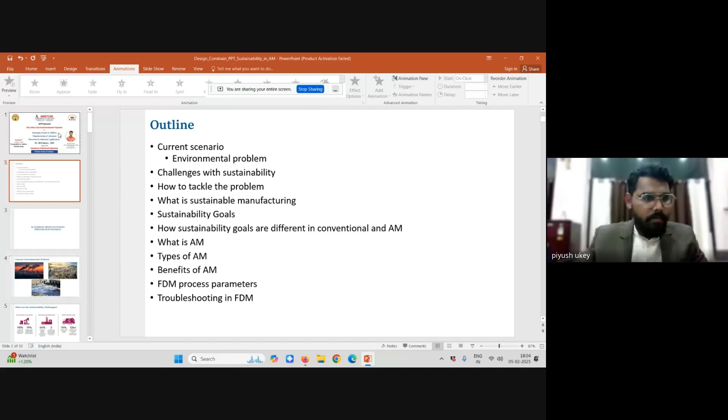First of all, I'll share the screen. Over to you, sir? Hello. Yes, sir. Thank you, sir. Can you see the slides, sir? Yes, sir. Thank you so much, sir. So let's begin with today's session.

So I'll begin with the question. So what do you think? Is the current manufacturing process sustainable? You can write in the chat box if you want.

So obviously, the current manufacturing process is not sustainable. If we talk about the current environmental problems, carbon emission is one of the major problems with the conventional process. Even the plastic waste, or the waste collected after the manufacturing process, is one of the major challenges. And water pollution is also one of the major issues with industrial production, as wastewater is deposited into the river, which pollutes the water. So these are major issues because of the current conventional manufacturing processes.

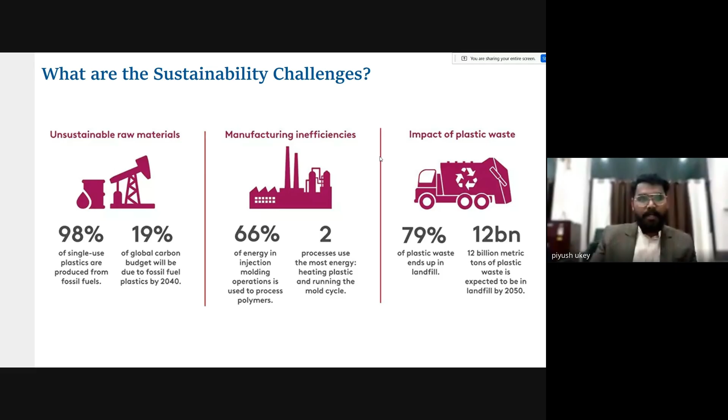So in order to make the world more and more sustainable, we need to cater to all these challenges which are there with sustainability. And how to tackle this problem? We can tackle the problem by using the resources more and more sustainably. Okay, to use the resources more sustainably, we should always follow the 5C approach, which is clean, community, culture, care, and corporate governance. So if we follow these 5Cs, we can optimize the use of the resources which are needed in the manufacturing sector, and thus make our world more and more sustainable to live in.

Because with the current setup we are living in, with more and more carbon deposits, we are polluting the world in a very big way. So the upcoming generation may not have the cleaner environment that we had. Our ancestors had one of the cleanest environments to live in, and we are living in, not the most, but at least a polluted environment where we don't have filtered or clean air to breathe. And if we continue with the same process, with the same attitude, then our future generation will live in worse condition than what we are currently living in. So in order to make things more and more sustainable, to reduce the impact on the environment, we should follow this 5C approach.

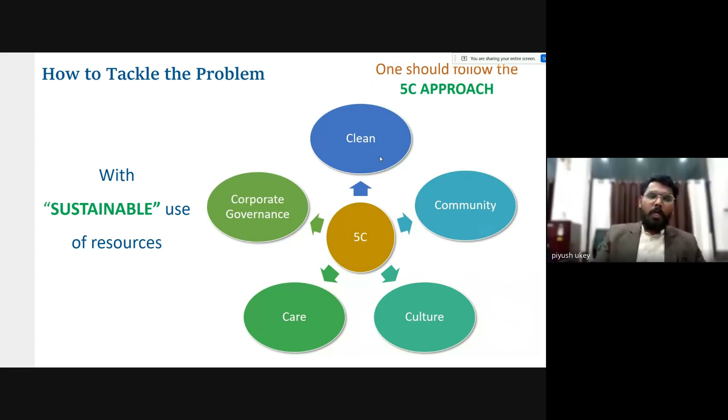Okay, so now coming to the main question, what exactly is sustainable manufacturing? So sustainable manufacturing is nothing but a process by which we can create a product by using the resources sustainably, by using optimized resources. For example, if we can make something which can reduce the carbon footprint in the environment, which can reduce the waste on the environment, if we can recycle the material and use that material, then ultimately it reduces the overall load on the environment. So that's what sustainable manufacturing is. The optimum use of resources to manufacture something is known as sustainable manufacturing.

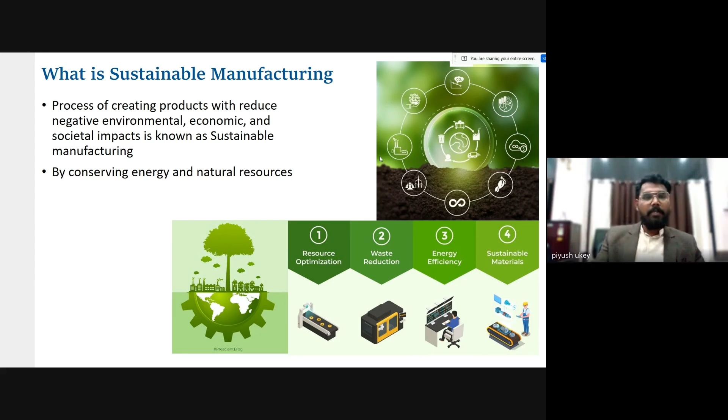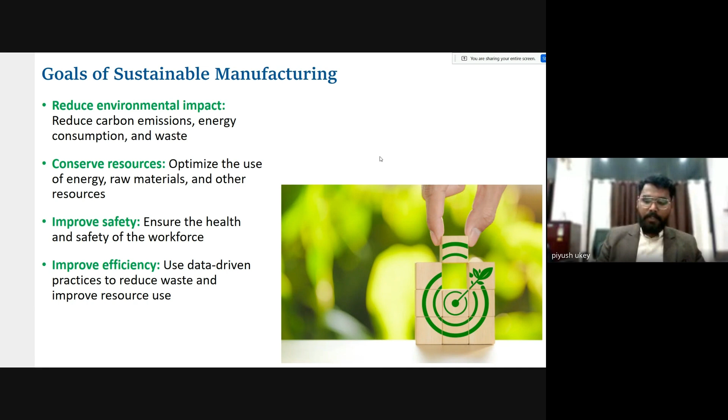Okay, so in sustainable manufacturing we can work in four areas: we can optimize the resources, we can reduce the waste, we can make the process more and more energy efficient, and we can make more and more sustainable products, like we can recycle the product. So if we talk about the goals of sustainable manufacturing, the goals are: reduce environmental impact, conserve the resources, like optimum use of energy, raw material, and other resources which are needed. We can improve safety, and we can improve the overall efficiency of the workplace as well as the product. Okay, so these should be the goals of sustainable manufacturing. So this is all about sustainable manufacturing.

Now coming to the next question, what exactly are the different manufacturing processes? So suppose this is the part which we want to make. Basically we have three manufacturing processes. The first one is the formative process, the second one is the subtractive process, and the third is the additive process. So in the formative process, we need a mold into which the molten plastic will flow, and once the plastic is solidified inside the mold, we will open the mold and remove the part. So initially only the mold is going to be there. The raw material will be in the form of a liquid, which will be poured into the mold, and finally we will receive the end part. In this process, there is minimum wastage of raw material.

Okay, but if we talk about sustainability using this process, the first thing is we need to prepare the mold. In order to make the mold, certain kinds of resources are needed. The mold will be made of metal, so a subtractive machining process will be done there, or maybe casting is going to be done to prepare the mold.

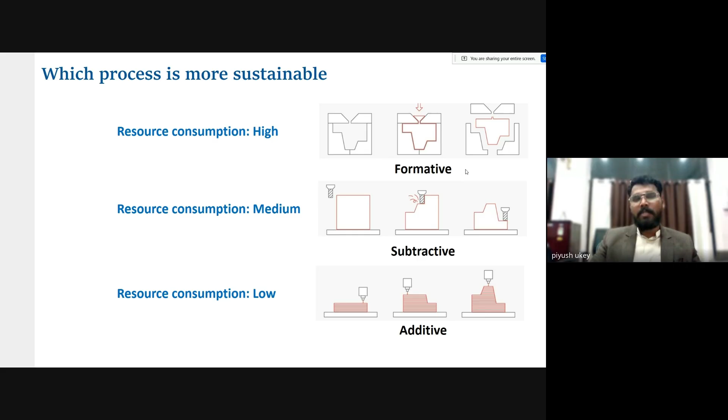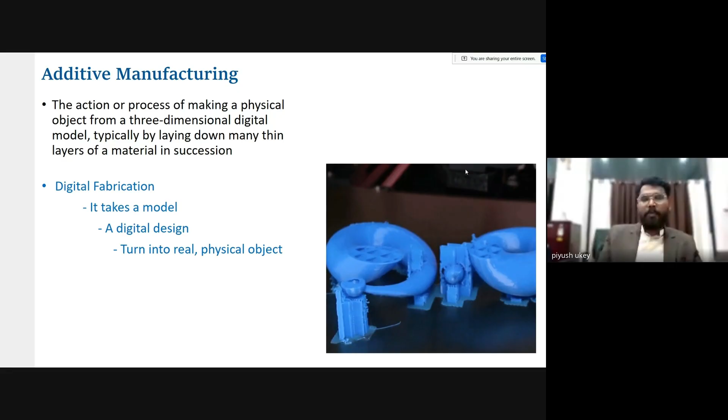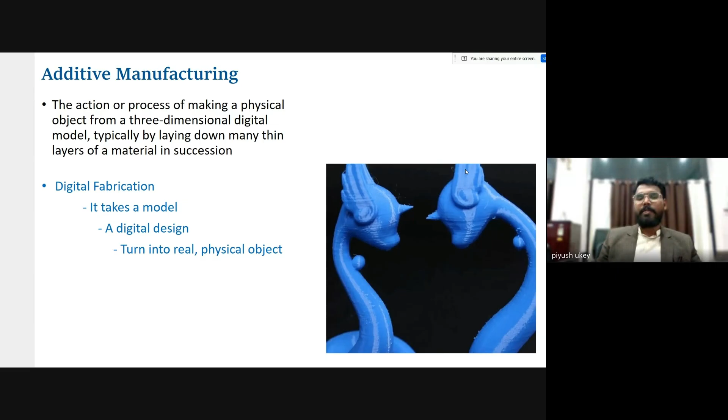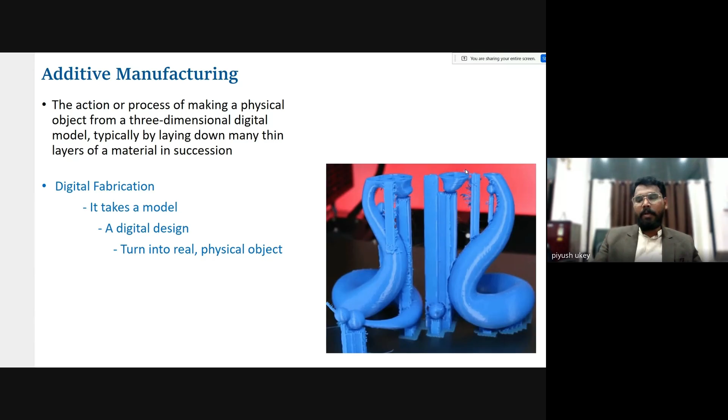So what exactly is additive manufacturing? Additive manufacturing is nothing but fabricating the part layer upon layer by stacking each layer one above the other. So additive manufacturing is a process of converting any digital design into a real physical object. Okay, as we can see in the video, the part has been fabricated layer by layer. Initially, we have nothing on the bed, but slowly, gradually, after printing each and every layer, the layers are added one above the other, and finally, we are going to get the end product. So this is additive manufacturing.

If we talk about the process chain of additive manufacturing, initially we need the CAD model. Once we have the CAD model, we are going to convert the CAD model into an STL file, which is also known as tessellation. Then slicing of the STL model is going to be done, followed by toolpath generation and support generation. Once the toolpath has been generated, we are going to transfer the toolpath or the G codes.

We will save the toolpath in terms of G code, and then this G code will be transferred to the 3D printer either by using a pen drive or a memory card, whatever the system supports. So based on the transferring medium, we just need to transfer the G code into it, and then the transferring medium can be loaded into the 3D printer, and the 3D printer will print the part accordingly.

And then once the part has been printed, we need to do the post processing. In post processing, support removal is going to be there. Even if certain kinds of surface finishing operations need to be performed, those surface finishing operations are also going to be performed in the post processing. So this is the overall process chain of additive manufacturing.

Even if we try to classify additive manufacturing into different kinds of technological classification, we have around 14 to 18 types of additive manufacturing processes. And in all additive manufacturing processes, despite the technology that has been used, this basic process chain will be followed by every technique of 3D printing. So coming,

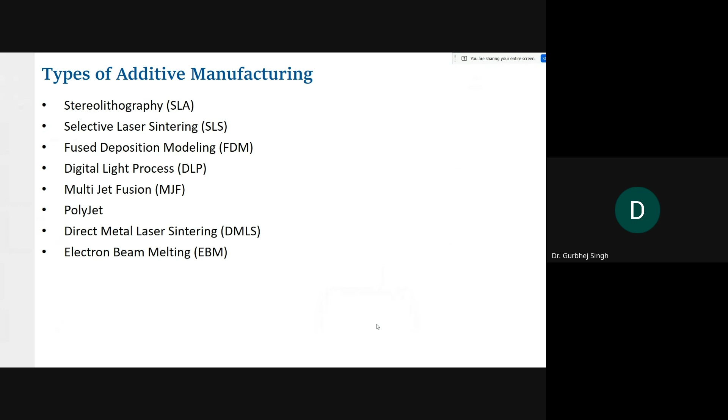So coming towards the types of additive manufacturing process, we can categorize additive manufacturing into three basic types based on the type of material used: liquid, solid, and powder. These three are the basic categories in which additive manufacturing can be classified. And among these three, we again have sub-classifications of the technique, like SLA and SLS.

If we talk about the first process, that is stereolithography, it is a liquid type 3D printing process. Then selective laser sintering is a powder based process. Then we have fused deposition modeling, which is a solid based process. Then digital light processing, DLP printing, which is again a liquid type 3D printing process. Then the multi-jet fusion technique, which comes under the powder bed technique.

Then we have the polyjet technique, which comes under liquid 3D printing. And we have direct metal laser sintering and electron beam melting. These last two are metal 3D printing processes, and all the remaining processes mentioned here are polymeric 3D printing processes.

Okay. So among all these processes, the most commonly used 3D printing processes are FDM and SLA/DLP. These two are the most commonly and most widely used in the sector. Even if you have a 3D printer at your institute or facility, it might be either FDM or SLA/DLP.

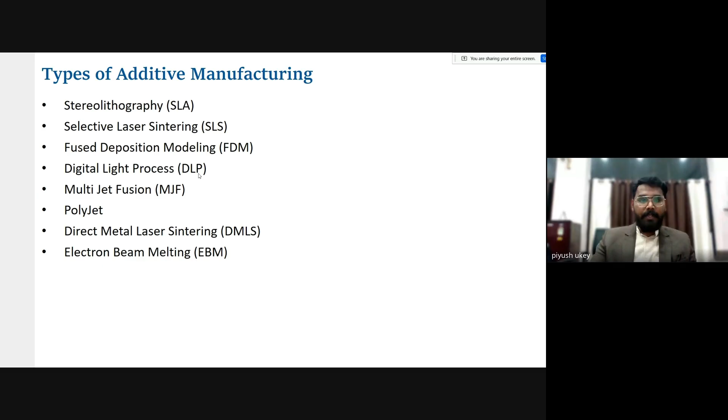After these two processes comes SLS. But very few institutes have an SLS facility, while 90 to 95% of institutes definitely have either FDM or SLA/DLP. So these techniques we are always going to find in the institutes. Okay, so I'll try to explain FDM as well as the SLA and DLP processes.

So coming towards the first process, FDM 3D printing. In the FDM 3D printing process, the material will be in the form of wire. Here we can see two wires being fed into the extruder system. The dark blue is the main material and the light material is the supporting material. We feed this material into the extruder head, where the material will be heated in the extruder nozzle assembly.

So this is number 4, the extruder nozzle assembly, where the filament is going to be heated, and finally the material will be extruded from the nozzle. The nozzle will move in the x direction, as we can see in the image. This is the nozzle tip from where the material is extruded. The nozzle is moving in the y direction. This is the bed moving in the z direction.

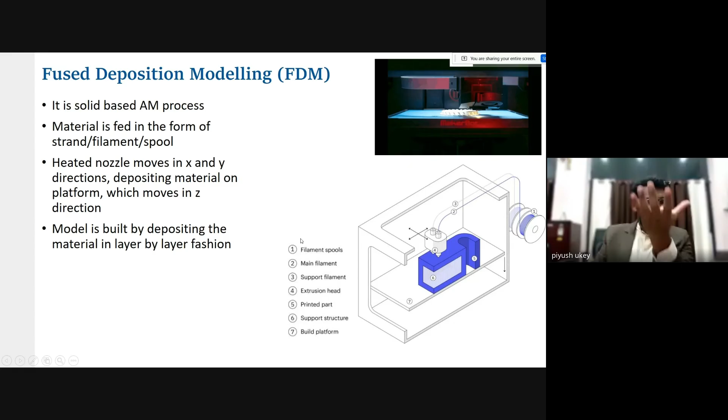Once one of the layers has been printed, the bed will move downward subsequently, and the successive layer will be printed there. So this is how the FDM 3D printing process takes place.

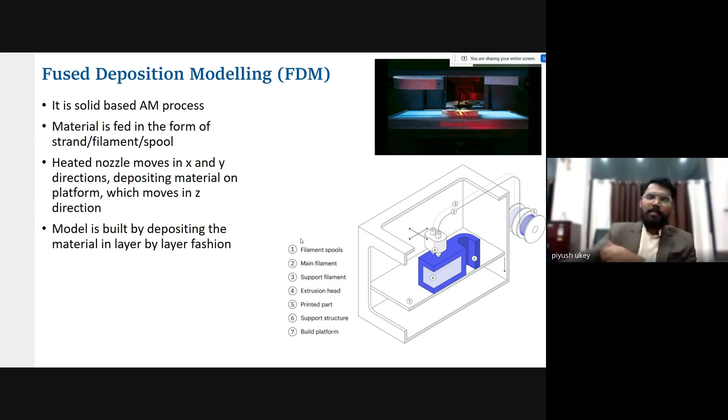Then if we talk about the SLA/DLP process, the working principle is that we use a photopolymeric resin in the form of a liquid, which will cure once it has been exposed to UV light. So here, in order to start polymerization, the material has to be exposed to the UV light.

So the process is, once this photopolymeric resin is exposed to the UV light, the laser will follow the tool path which has been generated during slicing, and according to the G-code, the laser will follow the tool path and the material will start getting cured. Whereas in DLP, the entire layer will be projected at once, and the whole layer will be converted into a solid form.

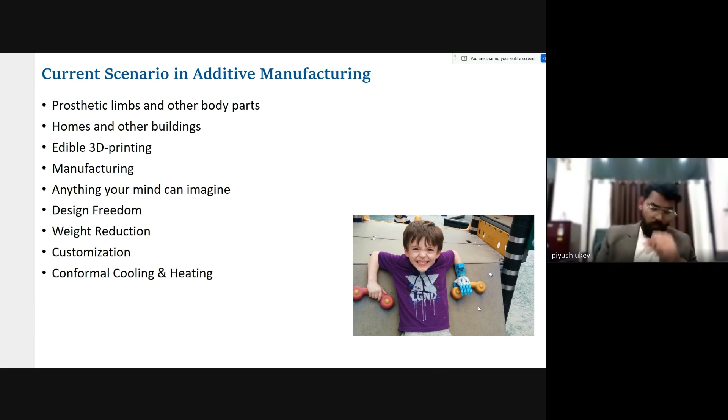And once we do this design modification and design iteration, we directly print the prosthetic and give it to the patient. So likewise, we can reduce the overall product development time with the 3D printing technique.

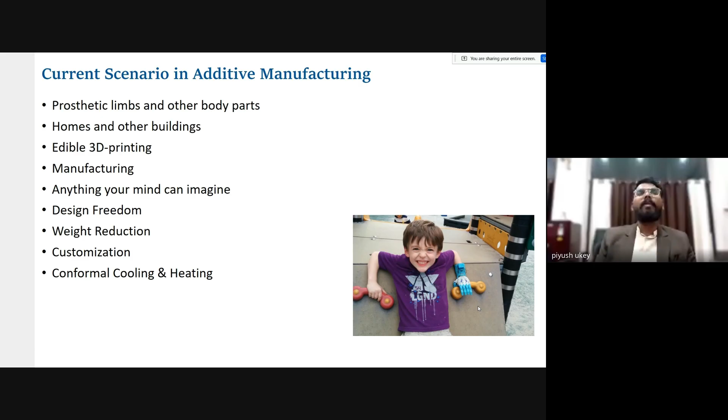Another one is home and house building, like construction. Now 3D printing is widely being used in the construction industry. In India, there are a few startups who are actually working in this sector. And L&T is also one of the first companies trying to get this commercial in the market. So this is also one area which has very good potential in the market.

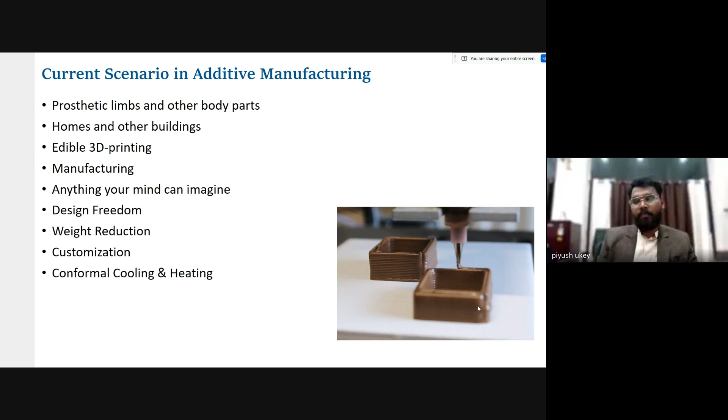Then we can use 3D printing for food printing. The food industry is also trying 3D printing a lot. They're trying to make parts with the optimum kind of material and resources needed. And with 3D printing, they can make many creative shapes in chocolate or cream toppings. So they have design freedom with 3D printing, and they can make complicated shapes.

Then we can use 3D printing in manufacturing. Now 3D printing is shifting from prototyping towards manufacturing, and many people are shifting towards manufacturing. Like the space industry is using 3D printing a lot in the manufacturing process to make their actual end components. Initially, in the 1990s or 2000s, when 3D printing was introduced into the market, 3D printing was mostly used to develop prototypes.

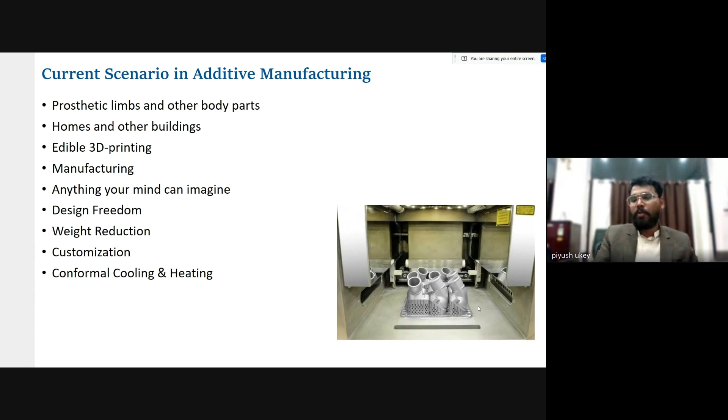But now the shift can be seen, like 3D printing is shifting from prototyping towards end-user manufacturing. Then we can make such kinds of complicated shapes. Whatever comes into the mind, we can make by using 3D printing. So this is one of the good tools for designers to make something creative out of their mind.

And such kind of complicated structure is impossible to manufacture by using a conventional process. We cannot do casting of this model, we cannot do CNC machining of the model, we cannot even do injection molding of the model. These kinds of structures are quite complicated to manufacture. So for such structures, 3D printing comes to the rescue, and 3D printing is the only option we can use to manufacture the parts.

Then we have design freedom. This is the example of a fuel injector nozzle which has been used in one of the aircraft. Initially they used to make this fuel injection nozzle in different smaller components, and later they used to assemble all the components together, and the final fuel injector assembly was used in the aircraft. And now they have reduced all the components into a single component, and they are manufacturing the entire part as a single 3D printed component.

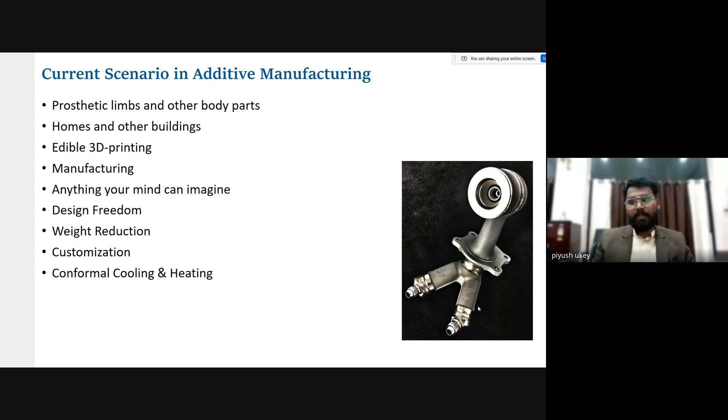So the beauty is, since we have reduced the components, we have reduced the weight, and with reduced weight, we have increased the overall efficiency of the part. Since we're talking about aircraft, if we could save 1 kg of load, we are obviously going to increase the overall efficiency of the aircraft. So with this kind of structure, they have increased the overall efficiency, the fuel economy of the aircraft.

Then we can work with weight reduction. Suppose this is the original model which needs to be manufactured. Due to shape and size constraints, we got the outward convex hull of the model. We know the maximum x, maximum y, and maximum z dimensions of the model, which we cannot change due to certain design constraints. If we manufacture it using CNC or any conventional process, this is the model which is going to be manufactured, and it is not going to be a weight-optimized model, since it's quite big, quite bulky.

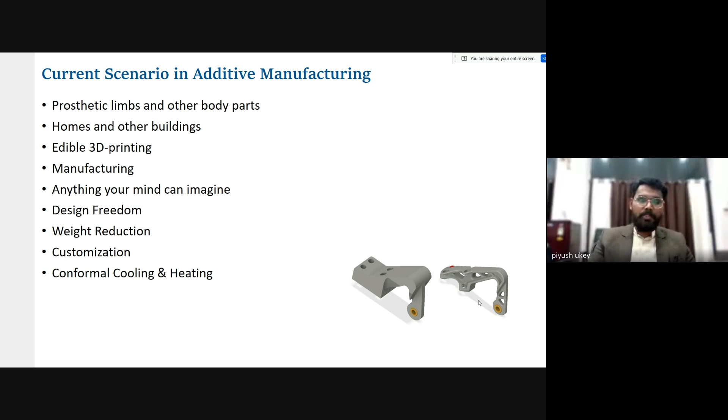But then we can do design topology optimization, and we can optimize the overall part into this kind of structure, where we can remove the material from the excessive parts, wherever we don't need much strength, and wherever strength is needed, there we can add material. So this is how we can optimize the overall topology of the design and reduce the weight.

Then we can use 3D printing for customization. Customization of the hearing aid is also possible with 3D printing. This is the example of a conventional process, where if someone wants to manufacture a hearing aid for the patient, first they'll pour silicone into the ear, and this kind of pattern will be manufactured. Then this pattern will be used to make the mold of the hearing aid, the enclosure will be produced, assembled with the electronic components, and the final hearing aid will be delivered to the patient.

But with 3D printing, instead of pouring silicone and making the pattern, we can directly 3D scan the ear of the patient, and once we have the 3D scan, we will have the 3D CAD model of the ear. Then we can directly design this kind of enclosure virtually. We can do the virtual fitment there itself. We can make the design more optimized, more economical. And once we have the optimized design, we manufacture it with the 3D printing process.

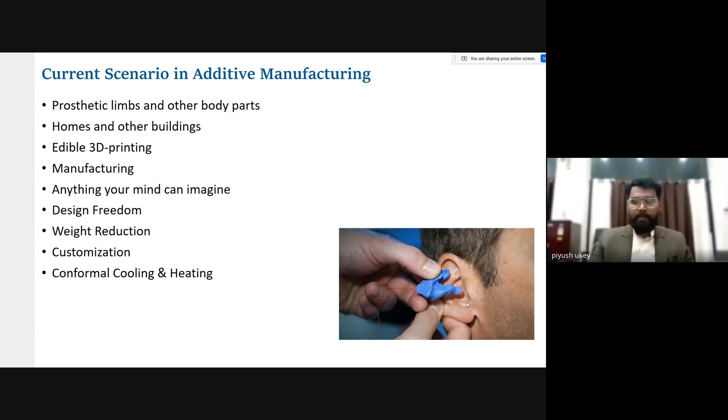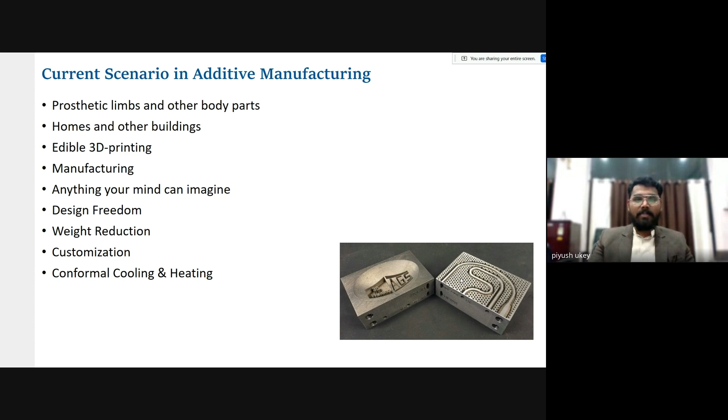And the last example is that we can use 3D printing for developing optimum heat exchangers. This is one example of a heat exchanger where we can reduce the weight of the part, and the weight reduction can be done by optimizing the overall density of the part. If we reduce the weight of the part, obviously less energy is needed to make it, and ultimately we can save a lot of energy and a lot of carbon deposition into the environment. So these are the current scenarios where additive manufacturing is mostly used.

Coming to the benefits of additive manufacturing, we can use additive manufacturing for batch production. Suppose this is a part which needs to be manufactured in a small batch; we can use 3D printing for batch production. Then we can use 3D printing to reduce the overall product development cycle time.

In the conventional process, first we ideate the design, ideate the part, then a prototype is made, followed by manufacturing, then assembly and distribution. From assembly we distribute the part, it goes to the warehouse, retail, and finally to the end user. So this is the overall product development cycle whenever we plan to develop any product, the conventional cycle mostly used to develop any part.

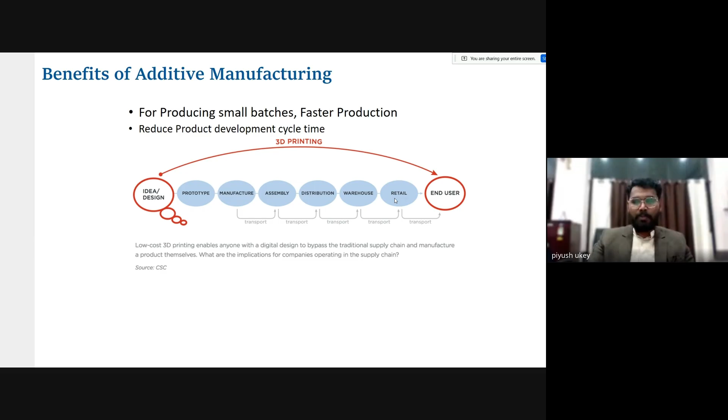But if you're using a 3D printing process, from the idea we can directly generate a virtual CAD model, and in the virtual CAD model we can do the design iterations. Whatever design iterations are needed to make the final product can be done virtually there itself. Once we have a final, ready-to-market design, we can print that design and directly give it to the end user for testing or the end purpose. Likewise we can eliminate the middle processes and save a lot of time and resources needed in product development.

Then, with 3D printing we can make complex shapes for tooling and pattern making. For casting, or for rapid tooling, if you want any patterns, we can definitely use the 3D printing technique for that.

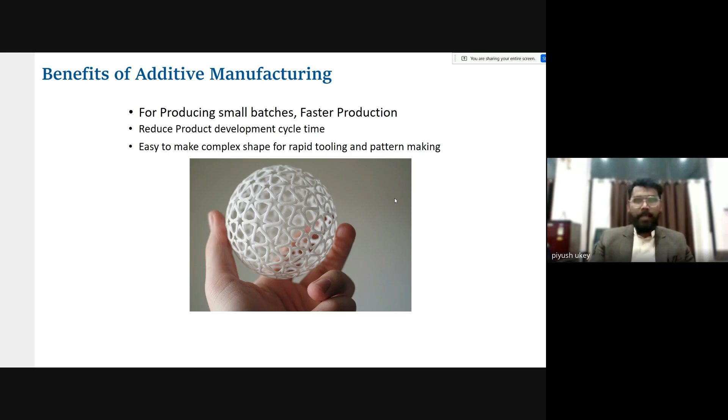Then customization: with 3D printing we can do mass customization. If I want to customize a particular product for the masses, we can do it quite easily with optimum resources using 3D printing. If I want to do the same with the conventional process, every individual product manufactured for a custom need will need a mold. If you're manufacturing with injection molding, every product will need a different mold. So n number of molds will be prepared, and with each mold different parts will be made. To cater to each one, an individual mold needs to be manufactured with a conventional process.

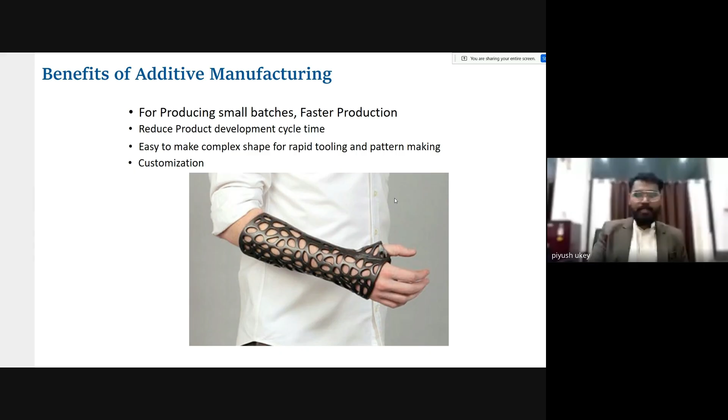But with 3D printing we can do this design customization virtually in the CAD model. Once we do the design customization in the CAD model and get the final design ready for print, we can print the part and give it to the user. That's how we can solve the customization problem. Then we can make creative, customized designs for the end user.

Again the same thing: if you want to make such complicated structures with a conventional process, first of all it is impossible with any conventional process. And second, even if we can manufacture certain designs with the conventional process, to meet the custom need we need an individual mold for each and every design we manufacture.

So with 3D printing, we can keep our canvas, or our catalog, quite big compared to the conventional one. I can keep hundreds of designs ready in my digital catalog, and the user can go through the digital catalog and select the particular design they are interested in. We can then manufacture that design using 3D printing. That's how we give the user customization freedom.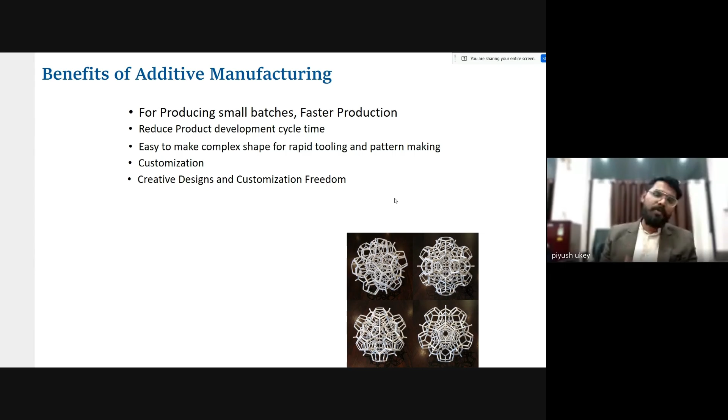So we give them a very big catalog to select the product from, which is actually quite difficult with the conventional process. Okay, so these are the benefits.

And coming towards the last one is the waste. We develop very little waste in the 3D printing process. If we talk about the subtractive process, subtractive is one of the most waste-generating manufacturing processes. And in 3D printing, since we are manufacturing the product layer by layer, initially nothing is there on the platform, and with the deposition of subsequent layers, the final part is going to be printed.

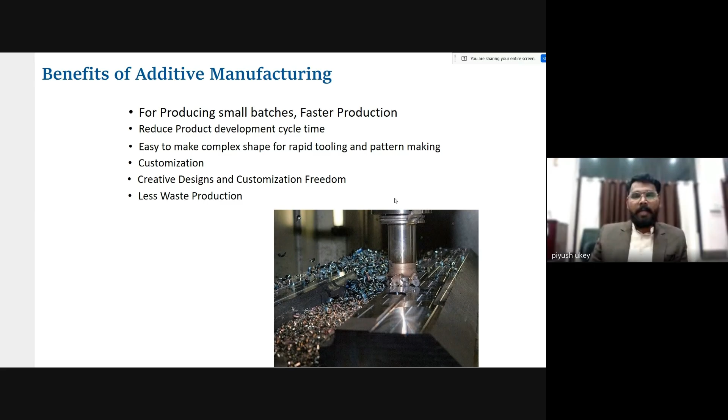So likewise, we can manufacture the part with very little waste. Okay. So these are the benefits of additive manufacturing. So coming towards the sustainable goals of additive manufacturing. In order to reduce the overall environmental impact, we need to reduce the use of raw material. So how can we reduce the use of raw material?

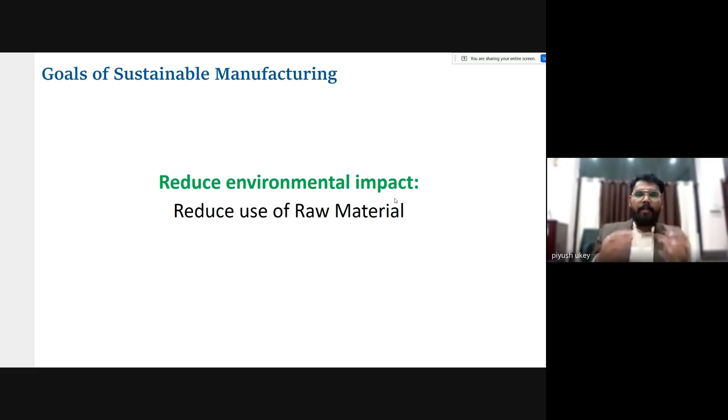If we talk about the raw material used in the FDM technique, the basic plastics being used are mostly ABS, then nylon, PC, and PETG. So these are the plastics which are being used. These plastics come from fossil fuel.

From the fossil fuel we manufacture the pellet, then this pellet will be converted into a filament form of material, which we consume to make the end product. Once the life of the end product is completed, that end product will either end up in the open landfill as waste, or we can recycle the material and bring it back to manufacturing, where the pellets are manufactured. From the pellets, the filament will again be made.

So this is how we can recycle and reuse the material again and again. So this is what we talked about for fossil fuel material. We can also use eco-friendly material like PLA, which originates from plants. That PLA plastic will be converted into the pellet, which will again be converted into the filament. From the filament, we make the end part, use it, recycle it, and again manufacture the pellet and the filament. So this is the circular economy.

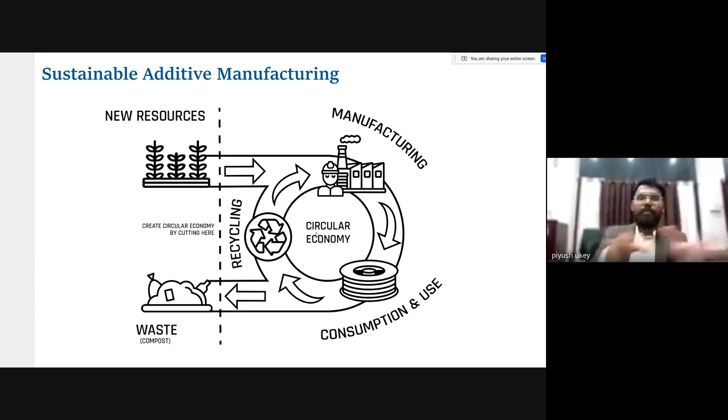And obviously, we cannot recycle the plastic again and again. We need to mix it with a certain amount of fresh plastic to ensure the strength of the plastic, because every time we recycle the material, certain properties are degraded. So likewise, we can reuse the material and make things more and more sustainable.

Okay. So another environmental impact is reduced waste. Whatever waste we're talking about, this is one part where the raw material is reused again and again. And second, if you're not interested in reusing the raw materials, then that part will end up as waste in the environment. So another challenge here is the reduction of waste. If we want to make the overall 3D printing process more sustainable, we should focus on two things: first, recycling of the raw material, and second, reducing waste material.

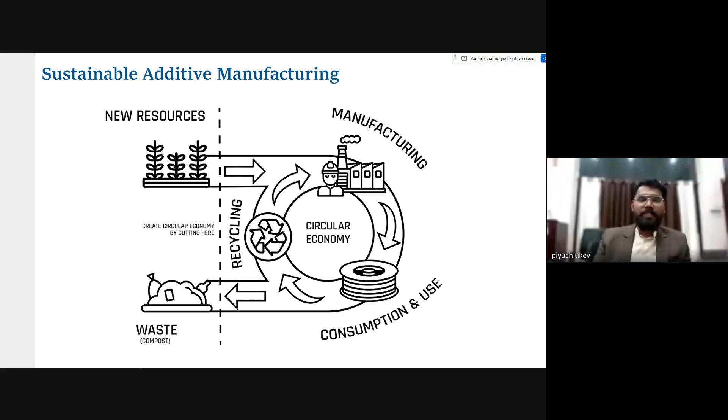So how can we reduce the chances of print failure? Again, that is one of the most challenging tasks, to reduce print failure. So if we talk about print failure, first of all we should know why print failure is occurring. Is it because the printer is not working properly, or the printer has not been calibrated properly, or is it the parameters, the G-code we have generated? Is it that we have not generated the optimum G-code for the 3D printer to manufacture the part?

So we need to find out these two ways. To reduce print failure, we should always focus on two things. The first one is the 3D printer calibration, and the second one is the process parameters being used to generate the G-code. Okay. So if my printer is calibrated properly, then the second thing is we should always focus on the parameters used while developing the G-code. We should use optimum values for the process parameters while generating the G-code. If we do, the chances of failure are going to be very less.

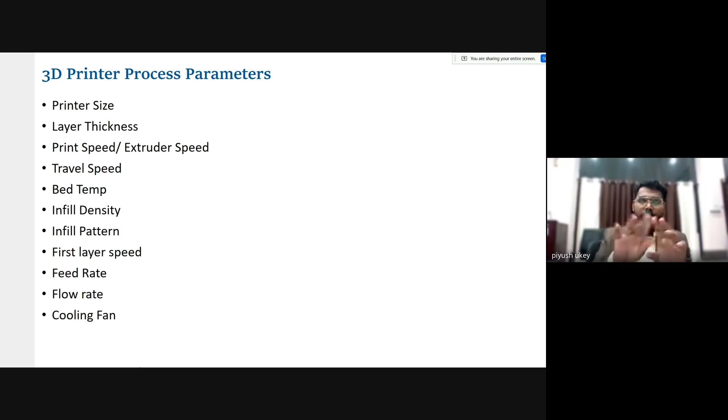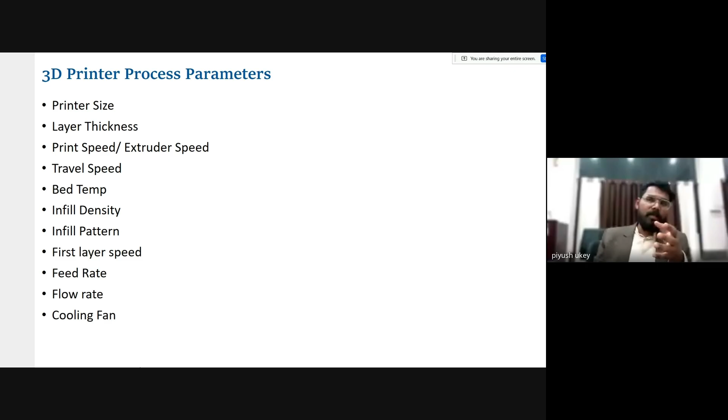For example, suppose I'm using a Creality Ender 3 3D printer, and in the machine printer size setting I have selected something else, let's say the Creality Sermoon 3D printer. Both 3D printers have a different build volume. If the build volume is different, obviously the basic settings will be different. So if I generate a G-code for the Sermoon and use it to print on the Creality Ender 3, obviously the part is going to fail. So the first thing is we should always choose the proper size and type of the 3D printer being used.

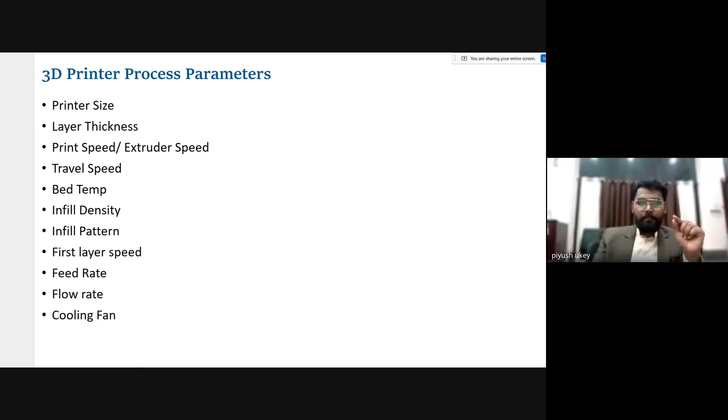Okay. The second parameter is the layer thickness. Again, layer thickness has a very crucial impact on 3D printing. This is the rabbit, the bunny, which we need to print. If I print it with a thick layer, the part is manufactured with a very rough surface finish, as we can see on the face. But a thick layer has a beauty: very little print time is needed to make the part.

But if you print it with a thin layer, here we can see the surface finish is going to be improved a lot. We won't get the exact surface finish of the CAD model, but the stair-stepping effect is reduced a lot. So the surface finish is quite smooth compared to the thick layer, and this is high-resolution printing. But obviously, with a thinner layer thickness, the print time is going to increase a lot.

So if we want good quality 3D prints and don't want to waste time on 3D printing, the solution is adaptive layer slicing. In adaptive layer slicing, whatever area doesn't need a good surface finish can be printed with a thick layer, and the area where surface finish is very important can be sliced with the thinnest possible layer. This is known as adaptive slicing.

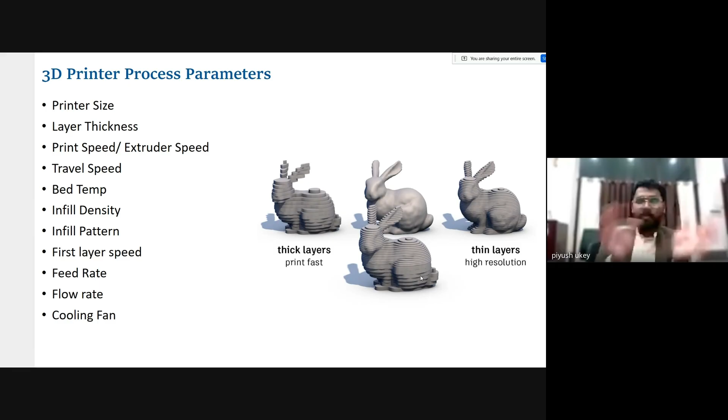Then we have print speed. Even the print speed has a very crucial impact on the surface finish of the part. Suppose this is an owl which has been printed. We have printed the owl at different print speeds, like 10 mm per second, 15, 30, 60, 90, and 120 mm per second.

As you can see, as the print speed is increasing gradually, the surface finish of the printed part has been reduced drastically. With the slowest printing, almost all the features have been preserved, and it shows a very high quality and detailed print. But with 120 mm per second of print speed, we can see almost all the details have been lost, and even some voids have been generated.

So we need to have an optimum print speed while manufacturing the part. With optimum print speed, we can also try to improve the print quality and reduce the chances of failures. And with the reduced chances of failure, again we are making the process more and more sustainable.

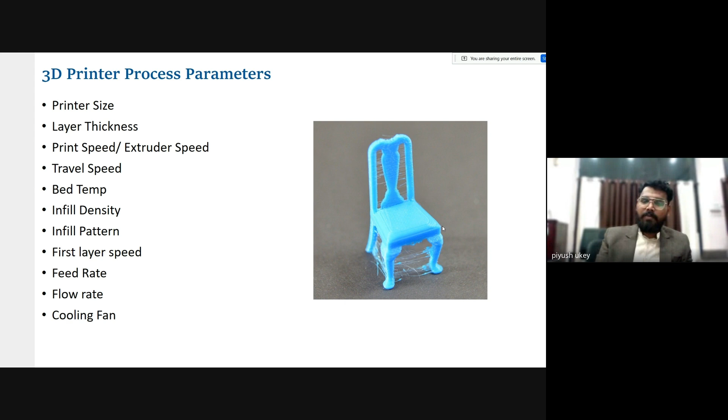Then we have bed temperature. Bed temperature is crucial to make the part stick onto the bed. We need to heat the bed closer to the glass transition temperature of the material being used. Suppose you're using PLA material, then we should always heat the bed to around 55 degrees Celsius, since PLA has a glass transition temperature of almost 50 degrees Celsius. We need to heat the platform closer to the glass transition temperature.

And if you're printing with ABS material, ABS has a glass transition temperature of 100 degrees Celsius. So we usually keep the platform temperature near about 90 to 105 degrees Celsius. And nylon has a Tg of 105 degrees Celsius, so the same thing for nylon as well. We keep the platform near about 100 to 105 degrees Celsius.

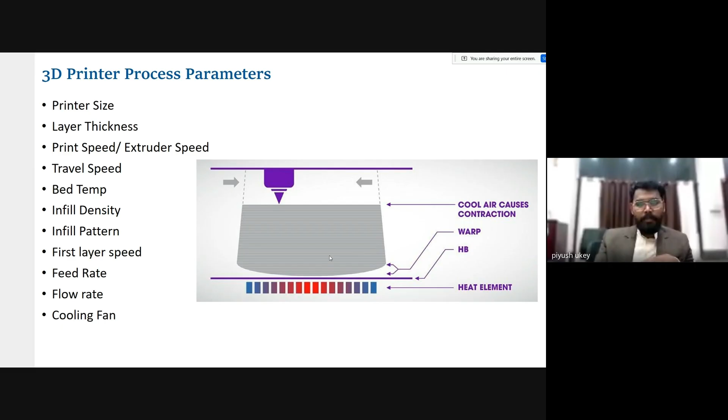The closer the temperature is, the higher the chance of the part properly sticking onto the build platform. And if the part does not stick to the build platform, the part will be removed from the build platform while printing, and again the chances of failure are going to be there. Okay.

Then the next parameter is infill density. Infill density is nothing but controlling the overall porosity of the part while printing. We can change the porosity of the part which has been printed. Here in the image, we can see the first part has been printed with 50% porosity, followed by 70% porosity, followed by 90% porosity. The same part with three different infill densities, or three different porosities.

The beauty is, if we can optimize the infill density or porosity of the part properly, we can reduce the use of the material needed to print the part, as well as the time needed to print the part. So these two resources can be optimized.

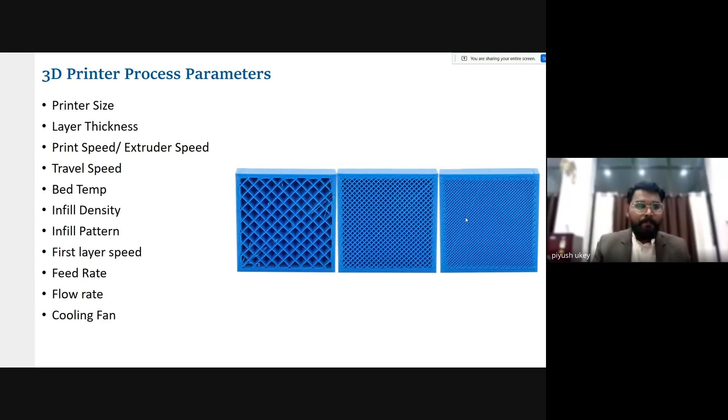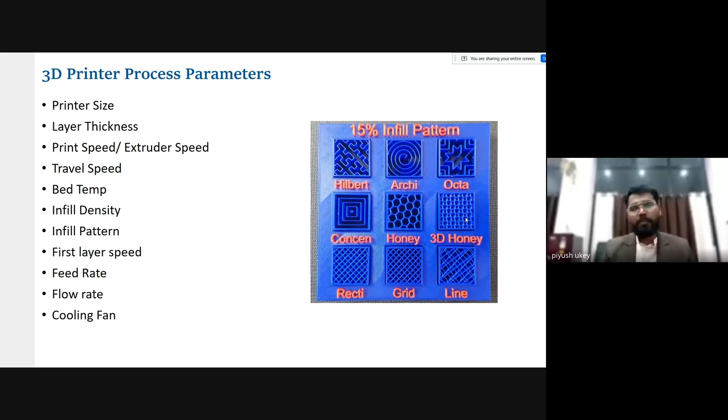Then next is infill pattern. Once we have decided the optimum kind of porosity that needs to be printed, we can also optimize the pattern, the porosity pattern which needs to be printed inside. We have different kinds of porosity patterns available in the software. From these, we can choose a particular pattern and use that pattern for the 3D printing.

Then comes the first layer speed. First layer speed is also one of the most important things. If we are not using a proper first layer speed, the part will not stick to the build platform, it will be removed from the build platform, and we need to restart the print. Every time we restart the print, we are consuming more and more energy and more and more resources, and we are making the process non-sustainable as compared to the conventional one.

Then flow rate and feed rate. Flow rate and feed rate are also important. These are the amount by which the material is fed into the extruder assembly. The extruder assembly is a block into which the material is fed in wire form, and molten material comes out from the nozzle. In that assembly, we need to optimize the input as well as the output from the nozzle: the rate by which the wire is fed into the assembly and the rate by which the material is coming out from the heated nozzle. We need to optimize the ratio between these two.

Suppose we are not optimizing it. If we are overfeeding the material, if the feeding is too fast into the extruder assembly, the excess material in the nozzle assembly will try to overflow, and it will ultimately block the nozzle. It will choke the nozzle, or the overall system. And if we are not feeding the material at a proper rate, the molten material within the extruder assembly will finish early, and we won't have sufficient material to melt within the extruder assembly. So we always need to optimize the feed rate into the 3D printer.

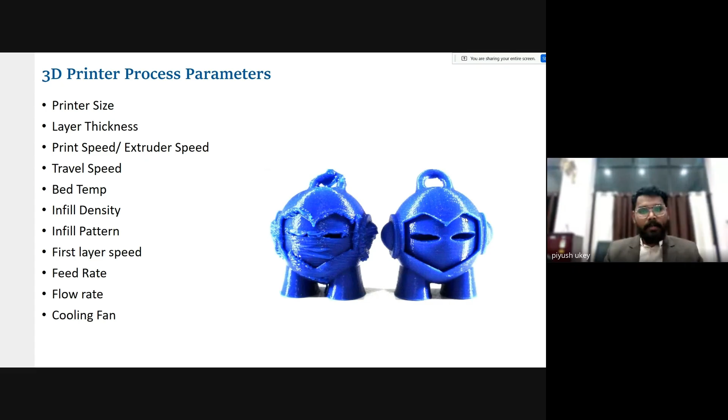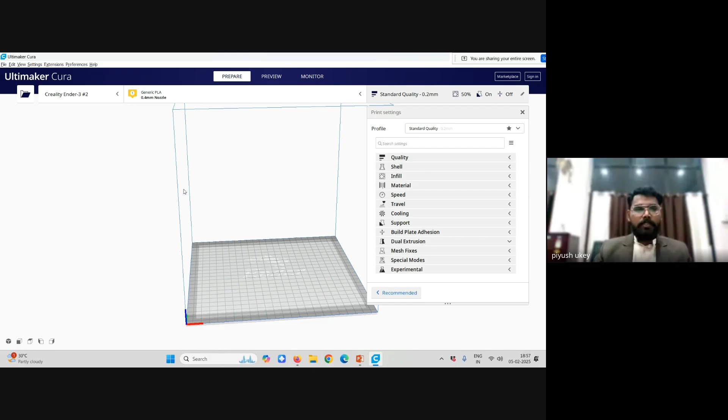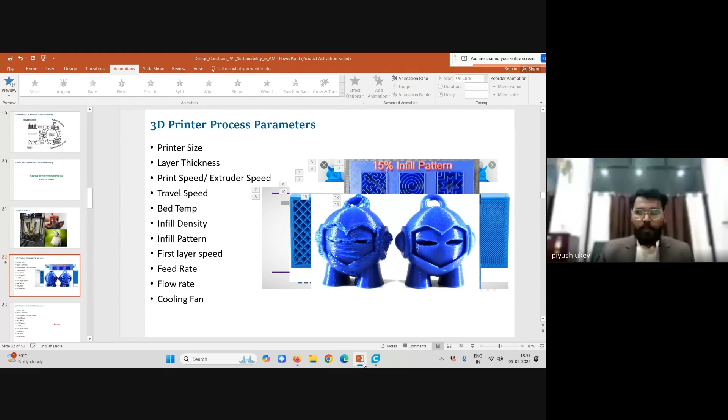So these are all the process parameters we can use to make 3D printed parts. Now I'll show you these process parameters in the software we usually use. This is the Cura software which we are going to use to generate the G-code. Whatever parameters I have shown you here to print the part with the optimum settings, I'll show all these parameters in the software.

So this is the overall Cura software. The first thing is we need to set up the printer. These are the buttons where all the features are, and this is the area where we are going to feed all the parameters in the software. To set up the printer, I'll click on the settings button, I'll click on printer, and I'll click on add printer.

Once I click on add printer, I have a non-network kind of printer. So I'll click on this button and the drop-down menu will open. It is asking me to select the 3D printer manufacturer. Suppose I have a Creality Ender 3D printer with me. So I'll search for the Creality manufacturer. This is Creality 3D, and these are all the different 3D printers manufactured by the company. From this list, I'll select the printer I have, the Creality Ender 3. So I got the 3D printer, and now I'll add it.

And next. Once we have selected the machine, we did the machine setup. This is the overall build volume of the 3D printer we have. It shows the overall build volume in the X, Y, and Z directions.

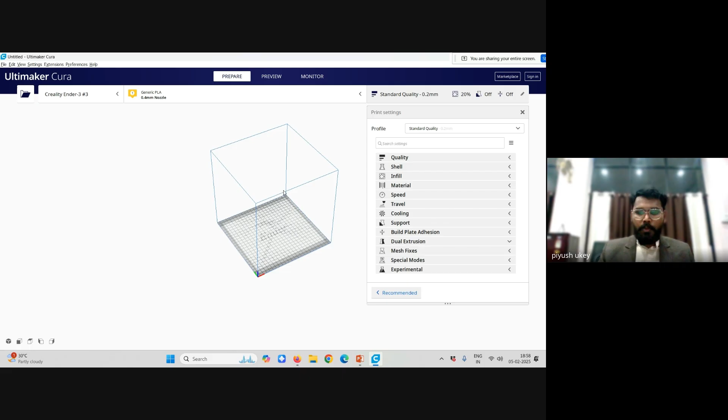Hello, sir. There is a network issue, please, sir. Check once. Okay, just a second. You are not audible, sir. Am I audible to you, sir? Yes, yes. Okay. Hello, sir.

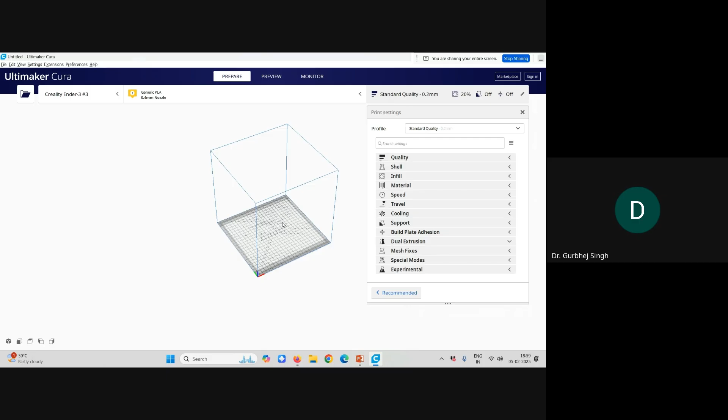So this is the overall build volume we have, the volume in which we can actually print a part. The first thing is we need to load the CAD model into the system. To do that, I'll click on open, and I'll select the CAD model which needs to be printed.

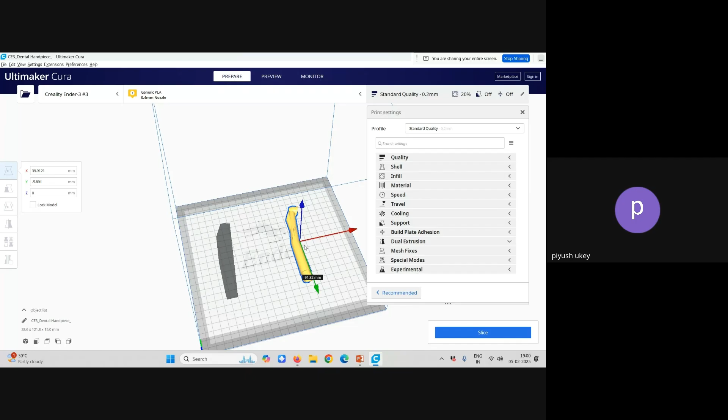So suppose this is the CAD model which needs to be printed. So the next thing is to set up a build area, to set up the part within the 3D printer. So to do that, I can choose where exactly I want to print the part onto the build platform. So I can keep the part there. So this is the overall X, Y, and Z platform where I can print the part.

So suppose if I want to print the part exactly on the center of the bed, here in this X, Y, and Z direction, I'll select the value 0 and 0 and 0. So now the part will be printed exactly in the center. Now the second thing is we need to do the orientation of the part. We need to select the orientation such that minimum support can be generated.

So here in this model, I can show you whatever the red mark is shown here. So in this area, the support is going to be needed. The support generation will be done. So again, we can see here, suppose in the

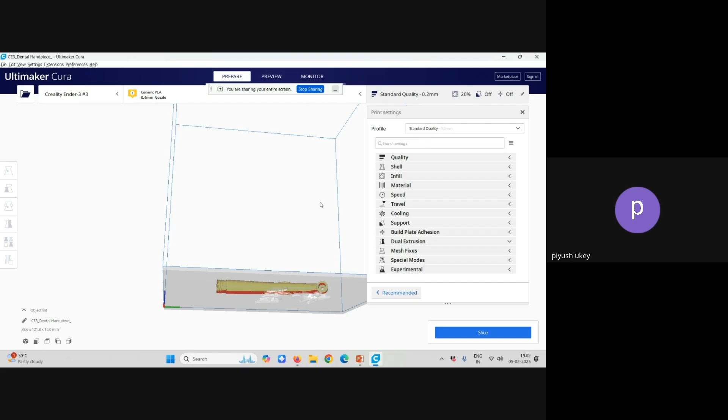Participants, please be online. Piyush sir will join us shortly. I think there was a network error. Now, am I audible to you, sir? Yes, sir. It's correct. Okay, I'll again share the screen. Is it visible, sir? Yes, sir. Okay, I understood what is happening.

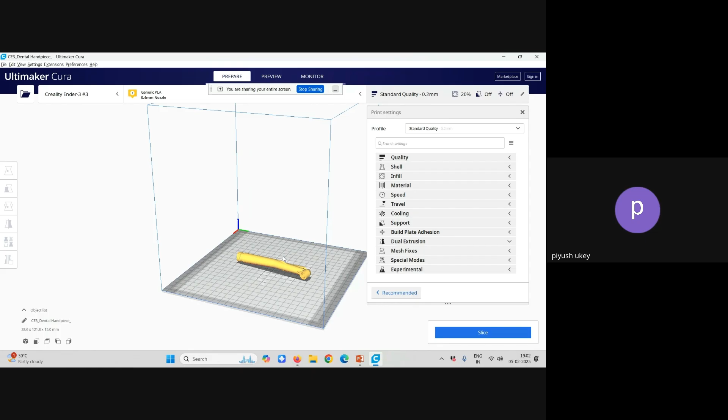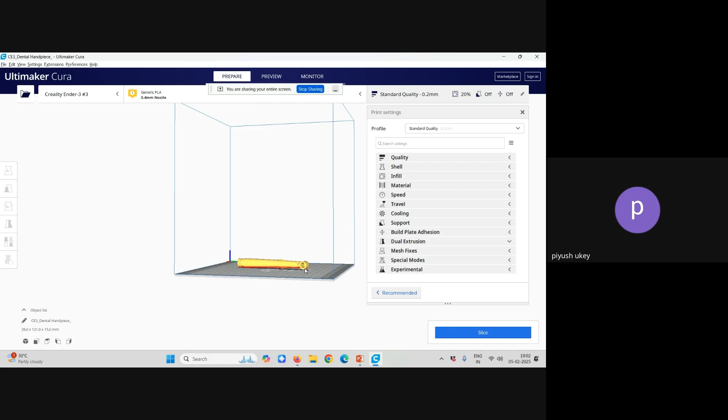So I'll try not to move the file quite fast. I'll keep it as a slow movement. So here I just need to reorient the part. So whatever the red area which is being shown on the screen is the area where the support will be generated. So if I show you with this orientation, I don't want support inside the circle, inside the cylindrical area. So what I can do, I can rotate the part in such a way that this circular area won't need any kind of support.

So to do that, I'll select the part. I'll click on this rotation button and I'll rotate the part. Okay. So now we have rotated the part. Now again, if I show you the model, now you can see inside the circle, the red area has been eliminated. It has been removed. So now it is showing that it doesn't need any support structure to make the part, but the support structure will be needed beneath the model. Okay, so this is the red area where the support will be generated.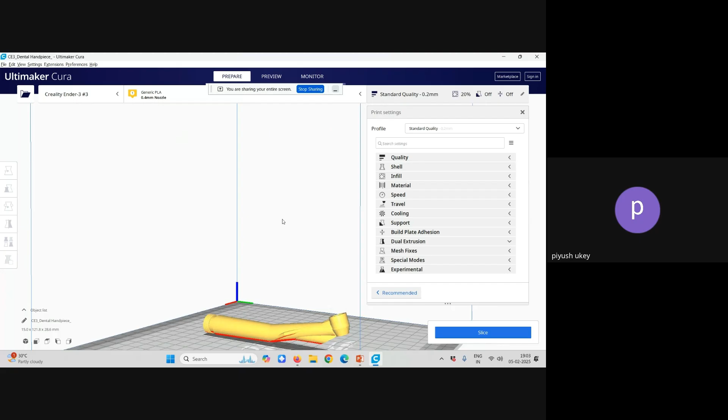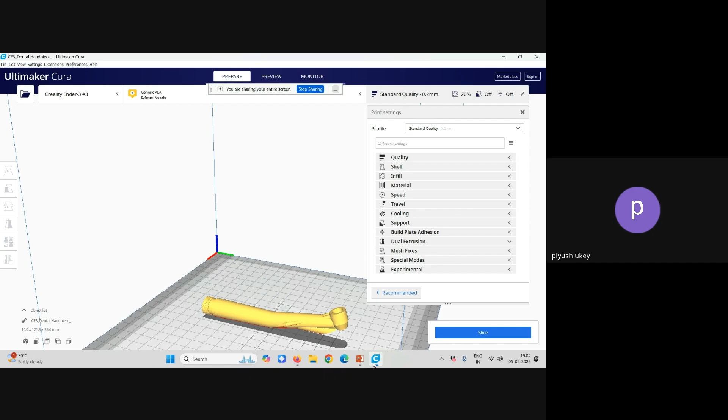So still a network issue is there. Hello. No, sir, your presentation is visible. Yes. Okay. Hello, sir. Yes, sir. Sorry, sir, you are okay. Okay, sir.

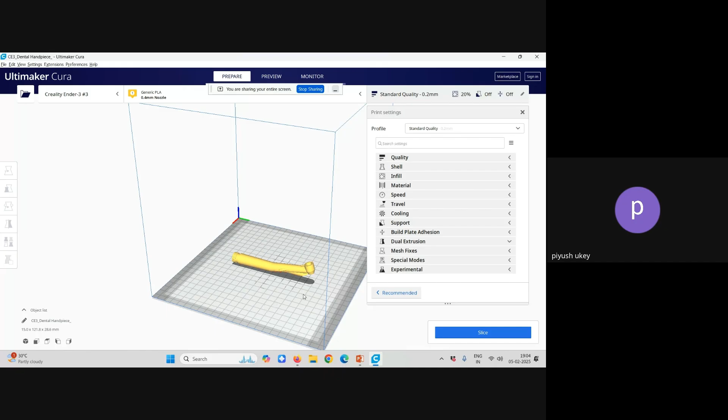So now we can see on the inside area, we don't need any kind of support. So this is the optimum orientation that I have selected. Now I'll try to feed the parameters which we need to make the optimum G-code so that we can reduce the chances of failure. So for that, just a minute.

Yeah, sorry for the disturbance.

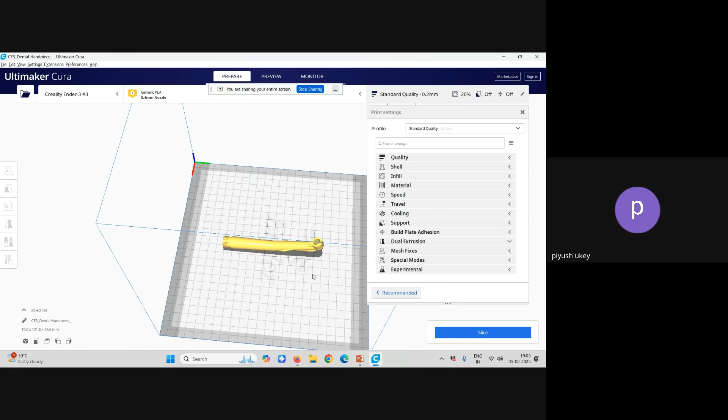So this is the part. Now the next thing is we need to use the optimum process parameters. So the first process parameter here is the quality, where we will choose the optimum layer height. So the first one is the layer height, which we need to select. So suppose if I want a very good surface finish, I'll be printing this model with a layer height of 0.1 mm. If I increase the layer height, what will happen?

The surface finish will be reduced, and the time is also going to be reduced. But if I reduce the layer height, the surface finish will be increased and print time will be increased. If I increase the layer height, like if I'm printing it with a layer height of 0.2 mm or 0.3 mm, then overall surface quality is going to be deteriorated, and less time will be needed to print the part.

So to get a very high quality of print, I'm using 0.1 mm as a layer thickness. Second is the infill. If you want to change the infill density, this is the option from where we can change the infill density.

So suppose I need this part to have a very good strength, so for that I'll be printing it with 100% infill. When I choose the 100% infill, here in the infill pattern we can choose the different kinds of infill patterns we want. But with 100%, it will by default use the line infill pattern.

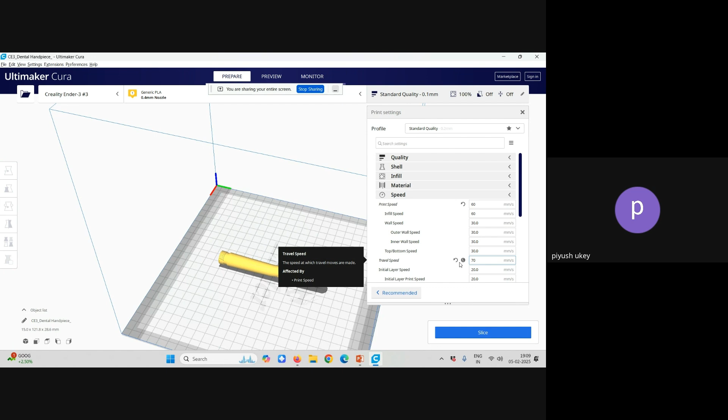Then here again, it is asking me to choose the travel speed. For ABS material, the travel speed is around 70 to 90 mm per second. And if I'm printing with PLA material, even for PLA the travel speed is the same, 70 to 90. And the print speed is also the same for PLA, 50 to 70 mm per second. So from here, I'll be choosing the travel speed.

Then the next is support. Within the support, here we can see the red area where support needs to be generated. So I'll simply click on the generate support button. It will automatically generate the support wherever it is needed. The software automatically calculates the area where support is needed, and it will generate the support.

Then we have print bed adhesion. In print bed adhesion, we have different types of adhesion, like skirt, brim, and raft. The skirt is nothing but printing the first layer outline offset by a 10 mm or 15 mm value. That value we can define within the software. We usually offset it by 10 mm, and that outline will be printed first. Once the outline has been printed, the layer printing will start. So that is what is happening in the skirt.

If I'm printing with the brim, the outermost boundary of the first layer will be offset by 5 mm, 10 mm, whatever value we choose there. If I'm using the skirt, from here I can choose the distance. Suppose I want a skirt at a distance of 10 mm, 15 mm, 20 mm, so I can choose that value.

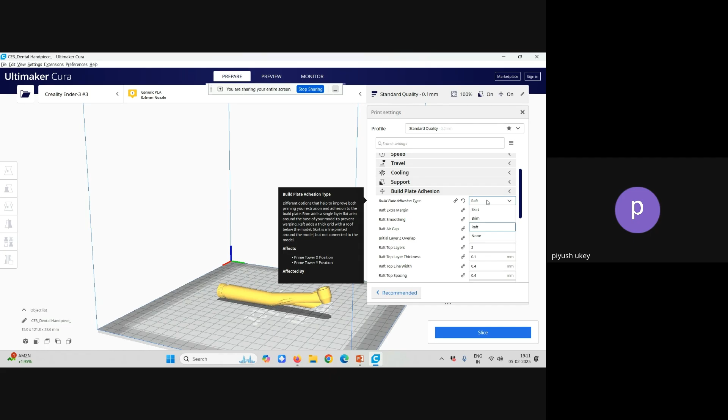If I'm choosing the brim option, it is asking me the overall brim width, like by how much the outer layer needs to be offset, so that we can define here with the brim width. In the raft, if I'm enabling the raft, it will generate an entire new layer beneath the first layer. So that is what is happening in the raft. So I'll be choosing the skirt option here.

And now we have input all the process parameters within the software. So once we have defined all the parameters to generate the G-code, we just simply need to click on the slice button.

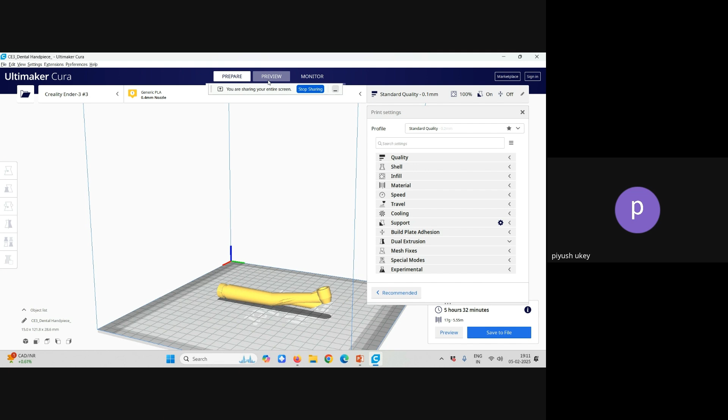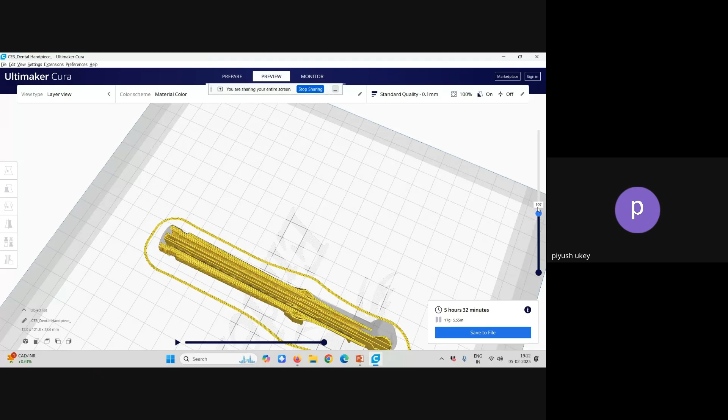So this is how the model will be constructed layer by layer. If I want to simulate a nozzle movement, if I press this button, I can simulate a nozzle movement. So this is how the part will be fabricated. So this will be the nozzle movement. And now it is infilling the in-between layer. So first it will create the contour, then it will fill the contour with the infill layers.

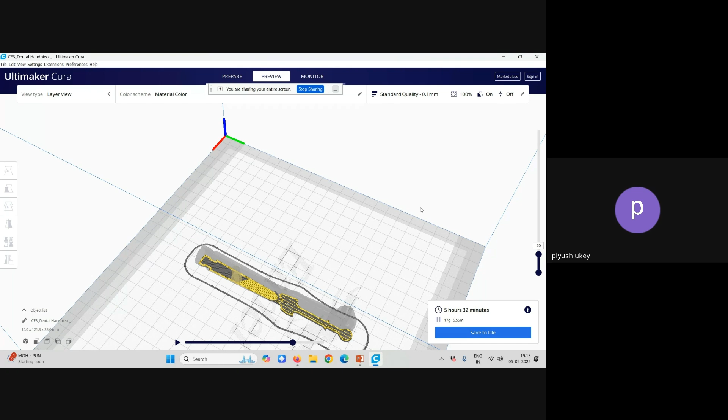Okay, so now the G-code has been generated. So we just need to click on this button, save to file, and we can save the code either in the pen drive or the memory card, which is supported by the 3D printer. So once we save the G-code into the memory card or the pen drive, then we just need to transfer the device to the 3D printer, and on the 3D printer we will select the file which needs to be printed, and we will start the print. So the printer will start printing the part as per the G-code. So this is how the overall 3D printing process works.

And with the optimum kind of resources, like the more failures there are going to be, the more energy consumption there is going to be, the more overall consumption of resources, which ultimately makes the process non-sustainable as compared to the conventional process. Suppose by using the 3D printing technique, we are able to save at least 40 to 50% of the overall resources needed to manufacture a certain product, as compared to the conventional process.

For example, if I'm manufacturing a pen by using a conventional technique as well as a 3D printing technique, and with 3D printing I am able to save at least 50% of the resources to make the part. The resources can be in terms of raw material, energy consumption, CO2 emission, or the waste which has been generated. So if I could save at least 50% of the overall resources, then we can say 3D printing is more sustainable as compared to the conventional process.

But if we are not using the optimum process parameters, what will happen? The chances of failure will increase a lot. So with repeated failure, we will reprint the part again and again. So repeated printing jobs will ultimately increase the consumption of the resources. So whatever resources we saved with 3D printing, the approximate 50% of the resources we save with 3D printing, it won't have any chance there.

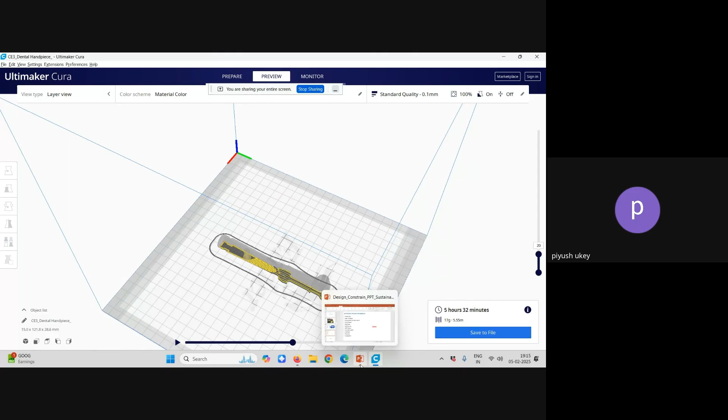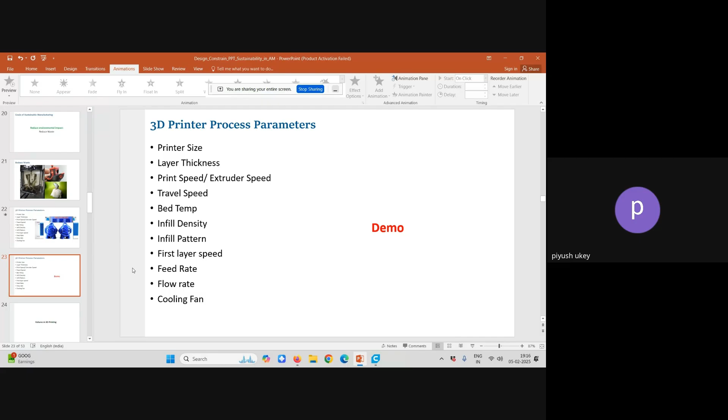So with this, I would like to conclude today's session. So if you have any doubt regarding the 3D printing process, regarding the sustainability of the 3D printing process, you can ask me. I'll try to answer to the best of my knowledge. So with this, sir, I'll hand over the session to you for further discussion.

Thank you, sir. From participants, any question from your side? Any question? Hello. Hello, yes, sir. Good evening, sir. Good evening, sir. The presentation was nice. Thank you, sir.

One question: what do you think is the biggest challenge for the successful implementation of additive manufacturing in industry, according to you? The biggest challenge is, we have three challenges here. So the first major challenge is the availability of the material. The 3D printing materials we have right now are ABS, PLA, nylon, PETG. So these are the most common materials.